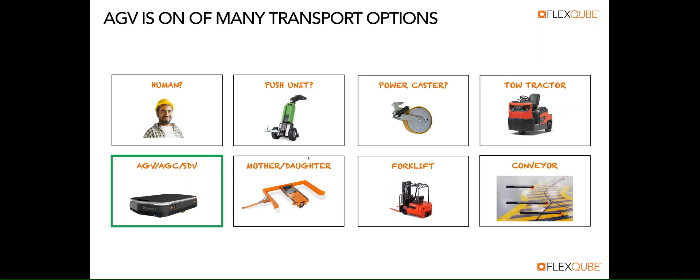So what do we actually mean when we talk about AGVs? It needs to fulfill some basic requirements. The first one is, of course, that it needs to be self-driving, so it shouldn't be any people involved in the actual driving. You also need some kind of collision warning, which means that the AGV is intelligent, so it can see or feel obstacles, and by doing that it can avoid collisions.

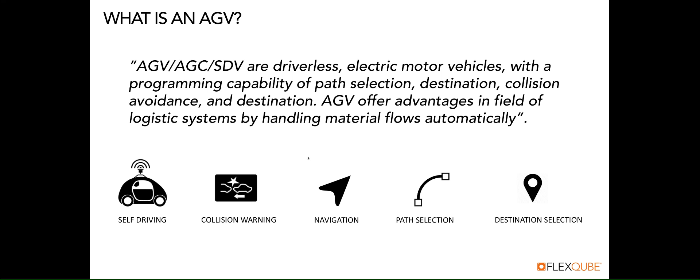If it's an AGV, it also has some type of navigation technique - we will go through that in the webinar, but that is also a requirement for AGV application. It's also possible to program the path, so you can select different paths and different destinations. In other words, it's a machine that can move parts or products from A to B without the involvement of human beings. We can see this has very big advantages in the field of logistic systems. And as the requirements are increasing on efficiency, this kind of equipment will be a main player in order to be more and more efficient.

Some basic history about AGVs. It's actually not that new an invention. The first official AGV was invented in 1953, so it's a pretty long time ago. It was placed at Esso's refinery - they invested in a rebuilt tow tractor, and this tow tractor followed a magnetic induction path that was integrated in the floor, and it towed a number of carts with load on it. So this was the very first AGV application, and it was also known as a Guide-O-Matic or a no-hands train. At this point, the name AGV was not invented yet.

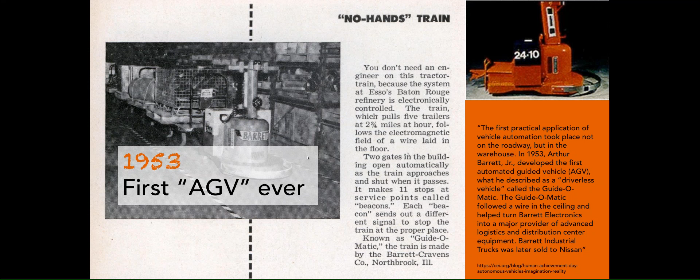So this was the first AGV for material transport. Later on, the AGV was also implemented in assembly operations - that means you have AGVs moving products when they are processed during final assembly. The first AGV for assembly was implemented at the Volvo plant in Sweden. At that time, they moved from a traditional mechanical conveyor and assembly line to a more flexible layout with the AGVs, and they had bays.

The workers were responsible to build a complete car instead of just a specific assembly station. In this project, the AGV was very, very crucial because they could navigate between those different bays in a very flexible way. This was in operation until '94, then they closed the plant because of the financial crisis - it was not big enough and not efficient enough. After this time, there haven't been any AGVs at Volvo for final assembly.

I think at this time it was also a trend that the popularity of AGVs kind of disappeared, for a lot of reasons. But the main reason was that the investments were pretty high, and maybe at that time the technology was not ready - it was too complicated, and it resulted in the total cost of ownership for the AGVs being pretty high. It was difficult to have a good return on investment when you spent this much money.

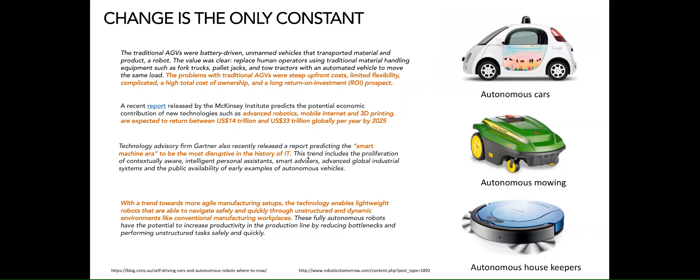It's also a very important part of Industry 4.0. If you have heard about that, it's describing the next revolution that we will have within manufacturing industry and supply chain. So it's a revolution that really will have a big impact in the long future ahead.

We have some examples of similar revolutions that we had. The first revolution was mechanization, starting with water power and steam power to have machines. The next big revolution was mass production, the Ford assembly line, where you split the work content between different assembly stations. That was a very big change for production.

And the next big revolution, Industry 3.0, was late in the 60s, where we started to do automation. That is the PLC software, the robots, all type of equipment that can replace humans, but they are still doing their own work. They are not collaborating with other machines. This was a very big step also in automotive, to add a lot of automation and robots.

And now we can see the next big step, which is called Industry 4.0. This is focusing on cyber physical systems, meaning we have very smart, flexible equipment in our factories, and all those factories can communicate with each other.

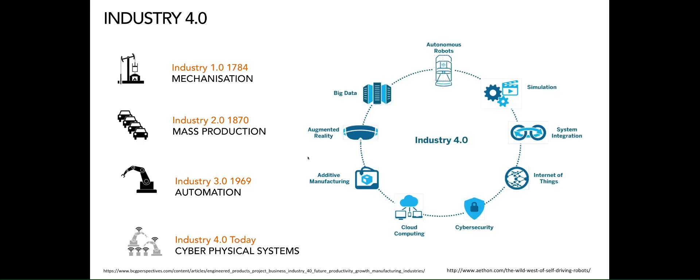And for sure, we need to find smarter ways of working. This shows the market trends, and I think all of you can recognize these trends. We have a lot of new products, increased number of variants, and that is increasing all the time and kind of developing faster and faster.

And in the same way, the total volume for each product and for each variant is decreasing. And another thing is that the life cycle is also decreasing, getting shorter. That means we have to change more and more often, and we need to adapt for new products more and more often.

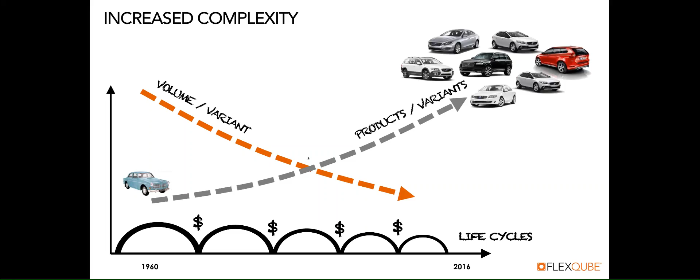So based on this, we will have a real challenge for the logistic concept. In the past, we had few and big industrial supplies. You had a few part numbers, maybe a pallet full with these part numbers, and it was transported to the assembly line where you could have it there for a day or two days.

Now we have more and more frequent replenishments, so you have a lot of different parts. They are presented in kits, and at a really high pace you supply the material in every takt. So if you have a car line moving the products every minute, for example, you supply the new parts every minute, so they can be picked just according to that assembly.

And we also see a trend that the footprint used in the plants is more and more used for logistic operations. In the past, you had the assembly line and most parts were located close to it. But we see a trend that more and more parts are stored in the preparation area, because you don't have enough space at the assembly line and you need more area to store the parts.

Investigations show that more than 50% of factories' area is used for logistic activities. And we also see a trend that it will be even higher in the future, that it will almost look more like a warehouse than an actual assembly or manufacturing facility, due to the demand from the customer that requires so many different part numbers in the products. And of course, this impacts the way we choose to do logistics.

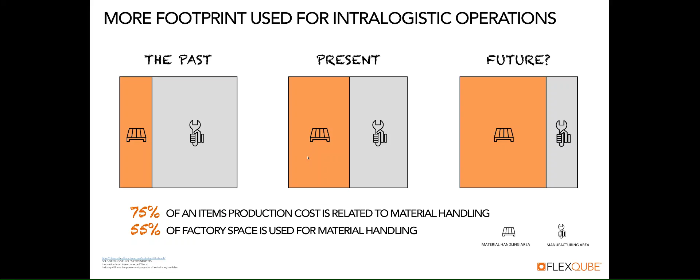If we can do logistics in a smart way, it will save us a lot of money, as this has a big impact on the footprint. And in that scope, the AGV is a really good enabler to make things more efficient.

We have different markets and different applications for the AGV, and from a flexibility standpoint, it's a really versatile type of equipment. We see it used in automotive, manufacturing, pharmacy, distribution, and hospitals. The type of applications is also very different.

We have movement of raw material, for example coil in a car factory. We move pallets and totes, so that could be moving parts from the warehouse to the assembly line or a picking area. We can move work in process, that could be a sub-assembly of an engine or a trim, some kind of product that is work in process. And as you saw in the beginning, there are also AGVs that move final products.

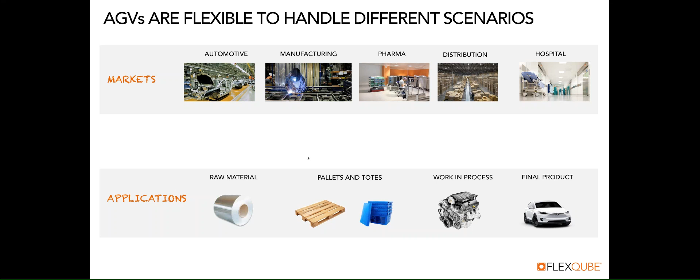What type of AGV do we need? What's the supply plan? We call it plan for every part, so each part needs to have a plan. How will we present it to the assembly line? How will we store it in the warehouse and so on? To have a rough plan for how to supply each part.

The layout is also very crucial to evaluate: the routes, directions, floor quality and so on. It's a lot of parameters that will impact your choice of AGV.

And finally, the material presentation, making sure that the end customer who receives the material will be happy because it's presented in a good way.

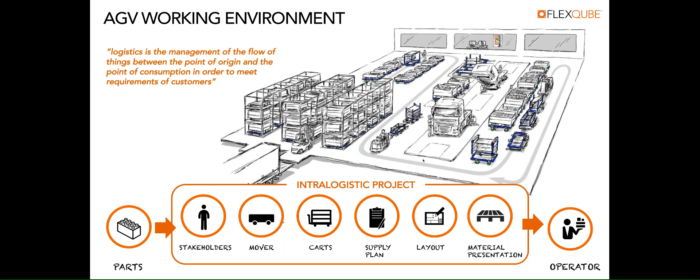So based on the requirements you have, there are 5 main categories of AGVs. Of course there are a lot of customized AGVs, but based on the volumes, these are the most common applications.

So we have the forklift AGV. It has exactly the same function as a forklift, but it's totally automated, so it can move and lift pallets.

Then we have the assembly AGV, used on assembly lines. Normally pretty slow speed, it carries the assembly object and moves from station to station, either indexing or with a continuous movement.

We have the load transfer AGV, where you move pallets on the AGV with the help of rollers. This is mostly used for pallet transportation.

We have the towing AGV, same principle as I showed in the beginning from 1953. It tows a number of carts, and this is really suitable for long transportations, heavy transportations, and you can take a lot of items or products with you at the same time.

And then we have the small load AGVs, and here is where we see the fastest technology development. This is where we find the small, flexible, agile products. They're used to move light parts, let's say around 100 kilos, and they can maneuver in tight areas and move with a very high frequency, a high pace. This is where we see a lot of new types of products coming into this segment.

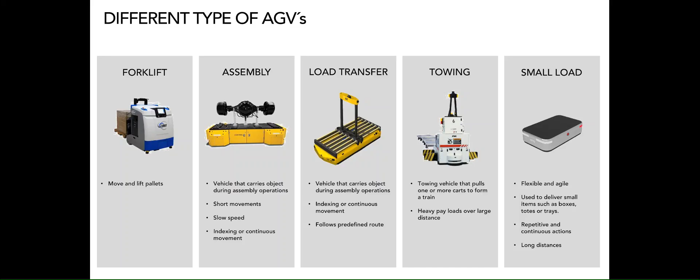When it comes to guidance options, this is also historical development. We have a very basic principle using magnetic tape, used for very simple AGVs. In some cases they're also called automated guided carts - they have very low intelligence and follow the magnetic tape placed on the floor.

We have magnetic spots - pucks that you place in the floor, and based on those, the AGV can maneuver different paths. The advantage of pucks compared to tape is that the AGV can choose to take different routes. With tape, it can only follow one specific route.

We have inductive guidance, the same technology used on the first AGV from 1953. You have induction wire milled into the floor, so it requires construction work and isn't really flexible - if you want to change the route, it will be a pretty high investment to do that. Then we have laser guidance.

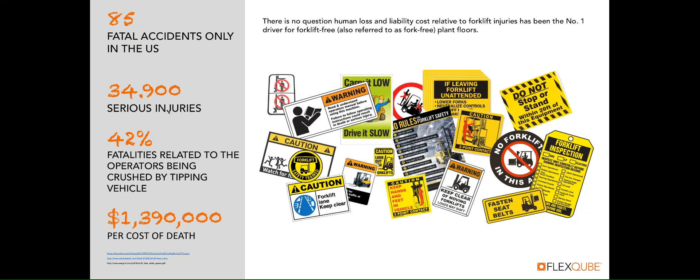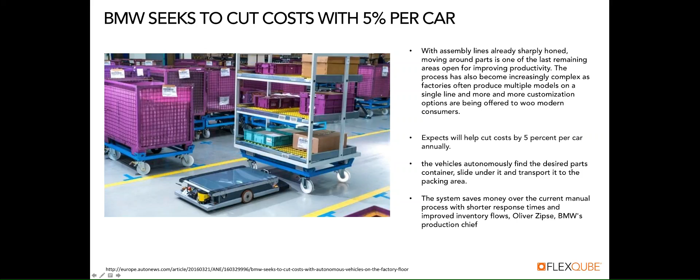And you can also see on this, you can see the sensors, so this is totally navigating on its own without any infrastructure. Some other benefits when it comes to the AGVs.

Of course, it can work very hard. It's a hard-working equipment. It can work 24/7. It's cheaper when it comes to operating costs, because you don't need the drivers. And also from an investment perspective, in most cases, it's cheaper than the forklifts.

And as I said in the beginning, they are getting more and more intelligent, so they can navigate on their own, they can speak to each other, they can take decisions on their own, they can choose when and how to pick up the part, which route to use to deliver it, in order to really make things in the most efficient way. And one of the main benefits is the flexibility.

We know that things change. In all products that FlexQube are involved in, it's a lot of change. You're changing the layout, you're changing the assembly station, you are changing the type of packaging and so on. It's a lot of things going on all the time, and then you need to be flexible, and that is the main advantage with AGV.

Also the safety, of course, that is improved a lot. You have predefined routes, you have a continuous speed of the vehicle. If an obstacle comes, it will stop. So there's a lot of safety features built in that will protect people, but it will also avoid collisions, which in the long term will also save a lot of maintenance cost on the facility itself, because you will not have a lot of damaged racks and damaged gates and so on.

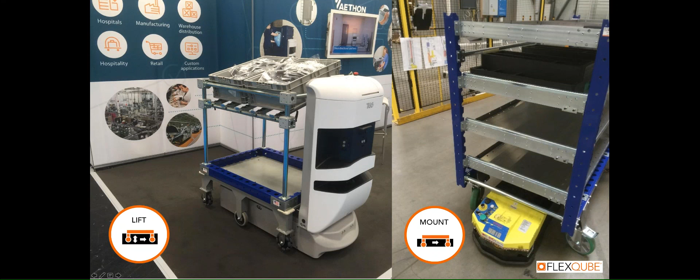This one to the right, that's a cart used for automotive assembly, including all the parts for a seat for a Volvo. So all parts to the seat are kitted on this rack.

This is the same cart, and here is a picture of the AGV. So it's a pin going up. This is the pin, you can see it in the middle of the white AGV.

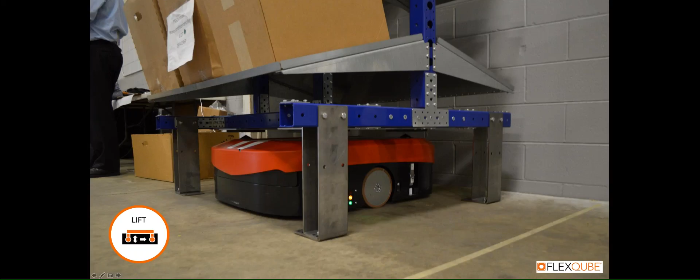This is the lift type as well, and one parameter to evaluate when you have the lift function is that if you don't need to move the cart around, you don't need any casters on the cart. So in this case you can see it's only on feet. So the robot is sliding under, lifts the cart, and takes it to the next destination.

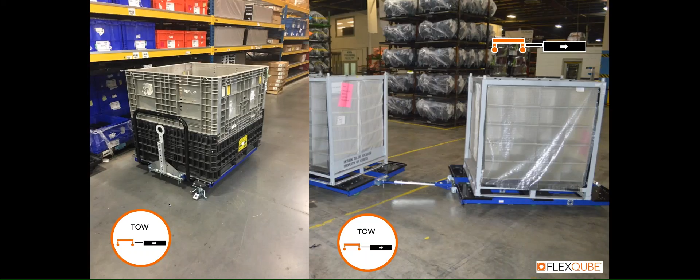This is carts that can be integrated with a towing AGV. FlexQube makes carts that are used also for tow tractors, and the type of cart is pretty much the same. The only difference is that the tow AGV is automated, and the manual tow tractor is driven by an operator. But you have different types of tow bars that connect the cart, and the cart is then connected to the tow AGV.

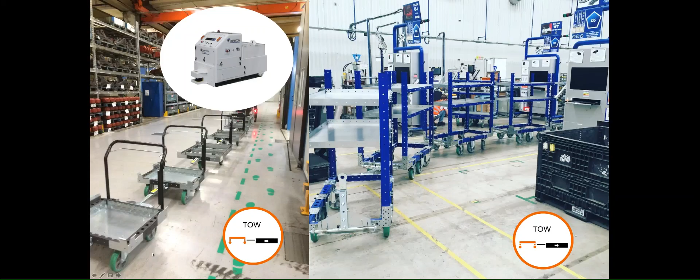And those can be configured in a lot of different variants, different size, different height, different applications, and so on. This shows the different solutions. So this is pallet carts to the left, and we have shelf carts to the right, that are all applicable and possible to integrate with the towing AGV.

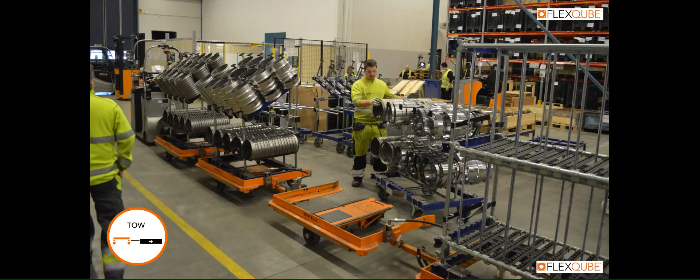This is another solution, a mother and daughter solution that can also be towed by AGV.

So those were some short examples, and as I said before, the carts are kind of a key enabler when you go for an AGV project, and a lot of different requirements and parameters will actually end on the cart designer's table. And this is the way that we design the carts.

We have the flexible building blocks, and based on those we have a number of steps we go through in order to design the carts. It's like simply Lego bricks, and we build different modules and put those together. So we start with the platform, then we add casters, and in some cases we add the tow bar. And of course those 3 steps are really integrated with the type of AGV that we choose.

As I showed you before, we have different types. We can lift, we can tow, we can only mount. And based on the decision or the preferred choice of AGV, it will end up in very different solutions here. But thanks to the modularity, it's very easy to change. So it's a focus area early in the project.

Then when that is fixed, we can start to look into the top structure. What type of load should we have on this cart? And those together will also affect the layout. So when you've chosen the AGV, chosen the type of cart, and so on, that will have impact on the way we can do the layouts.

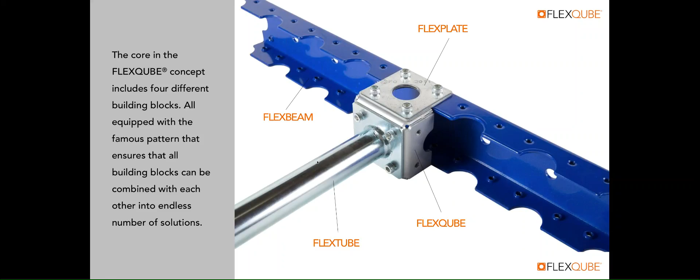So if you want to have a FlexQube design created, there are two different ways to do it. You have design for all, where you create the design on your own. And the second option is that you participate in a design on demand session, where you integrate with one of our FlexQube designers and create the cart together with them.

This is the process for design on demand. We ask you to do some preparations, and hopefully you have a pretty clear need of what you want and the requirements of your cart. You know, for example, I want an AGV, I want to move it like this, I want to transport this type of parts. Then we discuss this during a meeting and do the design in a live session. You provide the requirements and our designers do the design on time, during the meeting. In most cases we can end up finalizing the cart 80-90% during this one-hour meeting.

So the main target is to clarify all the requirements and have a rough concept agreed between you as a customer and FlexQube, so you have a common view of what cart we need.

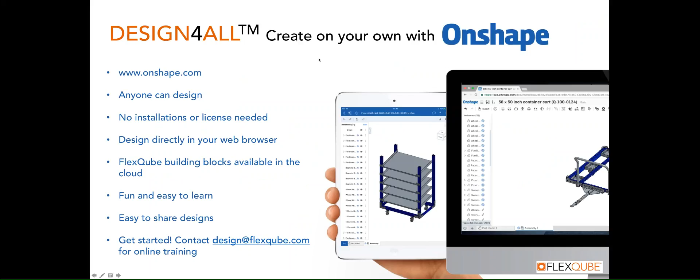Design with Onshape means you are doing the design in a web browser - no installations at all. It's very easy to sign up, and what we like about this is that we really want the FlexQube concept to be available for everyone. All our CAD files are available in this system, and it also works together with iPad. You can share designs with colleagues - just share a link and they open it and have the file open in their web browser. It's really seamless - this is the future way of designing carts.

If you're interested in training, we offer training sessions free of charge. So if you want to try your own designs and get started in Onshape or any other software, you can contact design@flexqube.com and we will get back to you with training.

Finally, I wanted to summarize the FlexQube concept. I've given you a rough introduction to AGVs, history, different types, different user applications and so on. One of the main benefits of the FlexQube concept is that it's a really platform-independent concept. Thanks to the building blocks, we can do solutions for any type of platform. If you choose to go for the AGV, you can choose a tugger train, or just move the cart manually - independent of the platform you need, we will be able to do it because we have modular building blocks.